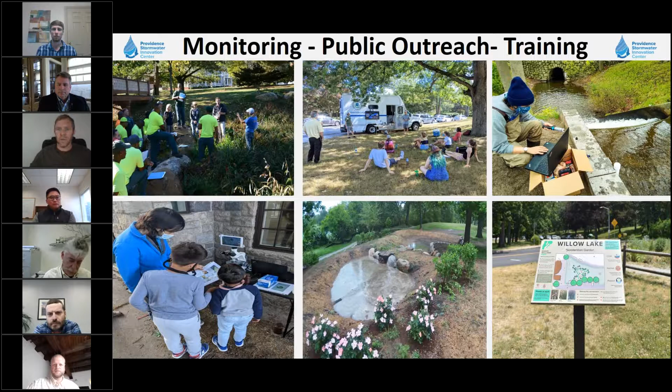Today's webinar is on the Jellyfish filter, and we hope this is the first of a series of webinars in collaboration with the Rhode Island Department of Environmental Management, going through some of their recently approved stormwater technologies.

Then Chris Bill with the Rhode Island Department of Environmental Management will talk about their approval process with these new proprietary stormwater technologies. And Derek Berg with Contech Engineered Solutions will get into the details about the jellyfish filter technology and some best practices when implementing and designing for it.

Then Hernan Peralta of Woodard & Curran and Brian Giroux of Deprete Engineering will give some examples and case studies of projects they've worked on in Rhode Island already using the jellyfish filter.

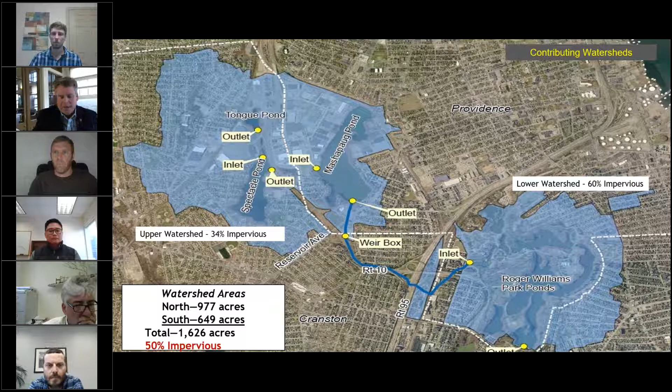So not only do we have a problem with the water coming into the park, but we also have a problem with the water that's here now. And the sediment in the ponds themselves are embedded with phosphorus and nitrogen, and the end result of that is cyanobacteria. So this is a very active park. We have a lot of people that fish here, we have swan boats, we have kayaking, we have all sorts of water sports that take place here.

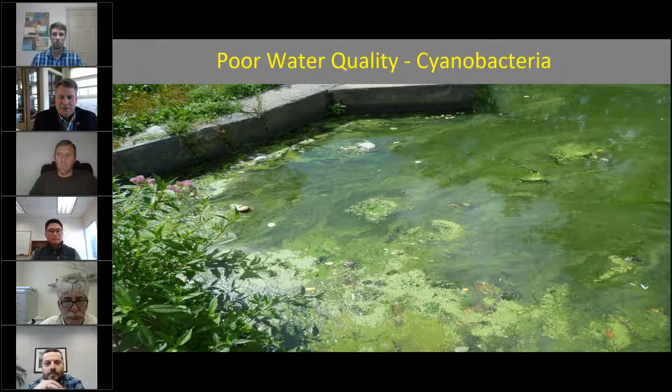So certainly from a public safety stance, we need to do better with our water quality. We can put as many signs up as we want, but the reality is people are going to do what they do, and we need to make sure that when they come in contact with the waters in Roger Williams Park, that they're safe. So to that end, we are continually looking to improve our water quality and remove the phosphorus and nitrogen and other contaminants that make their way into our water.

So getting back to the pond, and I will apologize for my rudimentary drawing here. It's not the fact that I am not good at CAD or didn't have time to, but it tells a better story. It tells a story about the Stormwater Innovation Center and what it is. This is literally a drawing that we made in a conversation with some of the great members of the Stormwater Center, UNH and URI and DEM and DOT.

So the basic function would be the pipe comes in from Mashapaug, it goes through a couple testing ports, it goes through the jellyfish filter, which we hope will remove most of the phosphorus that's connected to sediment. I'm not going to speak to the engineering of this because there's much more talented people than me on this call, but what we believe will happen is the phosphorus connected to sediment will be removed in the jellyfish filter. We're actually calling this a treatment train.

We're going to have a secondary facility that we can put different types of removal systems in as they are developed and as we choose. We're thinking we're going to start out with biochar - it'll basically be a concrete structure that we put biochar in, and we test that out for a couple of years, and then we may go on to the next thing.

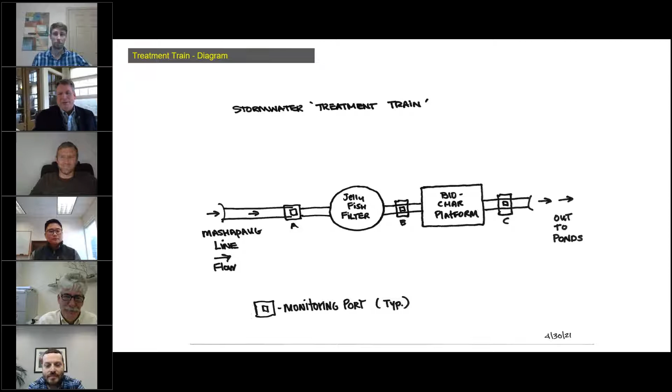I'm hoping that somebody invents a filter made of mattresses, because we are full of mattresses that have been discarded on the streets of Providence that we clean up all the time, and if we can find a way to utilize them, we'd be doing pretty well.

So again, just from a conversation with a couple of experts and researchers, we developed this philosophy and this intent to do this. The reason why we led ourselves to the jellyfish filter is because real estate was at a premium. There's not a lot of area between our property line and where this pipe comes into the pond itself. So the jellyfish filter can be used in a very small area.

So this would actually be installed in line in that pipe, with the treatment train, with overflows and bypasses that will allow us to deal with the bigger storm events. But in the end, this facility will be right next to Roosevelt Pond. Up higher from Roosevelt Pond is our casino.

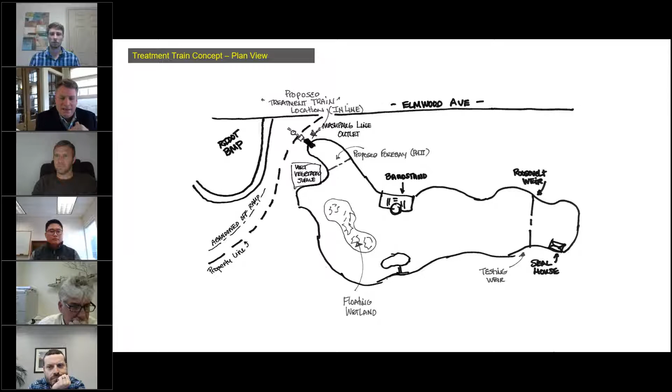There was never any gambling had at the casino, but we do a lot of trainings with the Stormwater Center at the casino. So the hope is to not only install this and get the contaminant removal, but also to provide training and some research about how this functions and what is needed to maintain them.

So the Rhode Island Department of Transportation has several of these jellyfish filters installed. As you can imagine, they're installed in highways, and that's not a great place to have a training. So it was a dual cause for us - one, we want the contaminant removal.

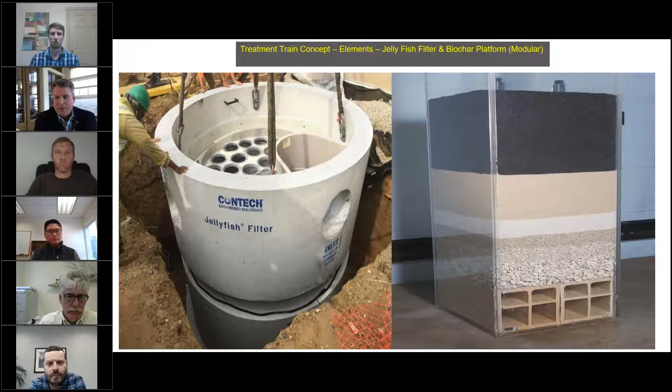We also want to be able to provide training to a brother agency that really needs it. That's why we came to the Jellyfish filter option. We think the treatment train will provide the contaminant removal we need, and also provide a training opportunity for Rhode Island DOT.

That's the mission of the Stormwater Center: provide opportunities for all stakeholders to share in their challenges, issues, and struggles. We know bad construction design can be difficult, both in the actual construction and the maintenance. Bad construction that's not done right leads to poor performance, and poor performance ultimately leads to poor water quality. So that's what we're looking at here at the Stormwater Center. The Jellyfish option isn't just phosphorus removal, it's a training opportunity.

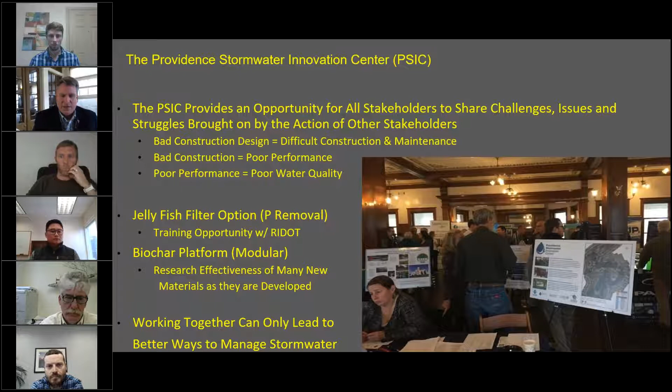The biochar is modular, so we can retrofit it, as we said. Ultimately, working together leads to better ways to manage stormwater, and that's what we do here at the Providence Stormwater Innovation Center. Reach out to us at stormwaterinnovation.org and let us know if we can help, and share the information you've been gathering about what you've been doing in your home or municipality.

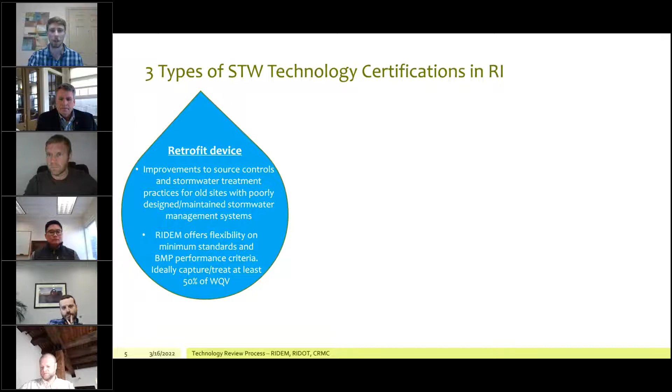Are there different types of stormwater treatment technology certifications in Rhode Island? Yes, is the short answer. There are three different types. The first is a retrofit device, which is basically just making an old or poorly designed or maintained site better. We're pretty flexible on our minimum standards and BMP performance criteria for this, because it is still an improvement at the end of the day. Ideally on these retrofit projects we'd like to see at least 50% of the water quality volume being captured and treated, but we are more flexible on the performance criteria for pollutant removals.

Next we have pre-treatment devices, which are used to protect water quality BMPs from getting clogged with things like sediment and trash. We require that any proprietary pre-treatment device that gets approved show at least 25% or greater removal of total suspended solids. These can also be used as retrofit devices. They won't get nutrient removal or necessarily bacteria removal either, but it will still be an improvement, like I said. That's why it can be used as a retrofit.

Another note for pre-treatment devices: previously we allowed them to be used as oil water separators as well if they had greater than 500 gallons of hydrocarbon storage. But we are no longer allowing that anymore because of some recent discoveries that we've made.

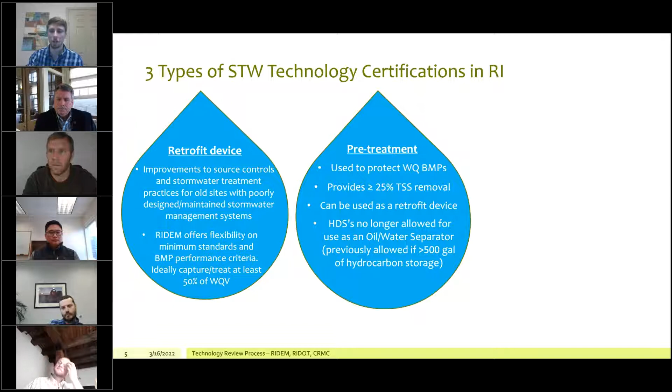Last, you have water quality BMPs, which are the highest level of certification for a device. They must provide at least 85% removal of TSS, 60% for pathogens, and 30% for total nitrogen and total phosphorus. Vendors can also, if they can prove with adequate testing that they get higher pollutant removals, for example the Jellyfish, I believe, is approved for 50% phosphorus removal. They can do that, and also get approvals for other things such as other pollutants like metals.

And down at the bottom, there's the application form that vendors have to fill out and submit to us to start the application process for a technology.

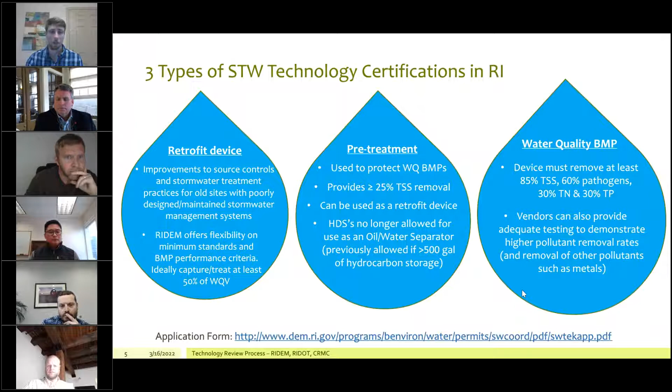Moving on, how does the application and review process work for these proprietary stormwater treatment devices in Rhode Island? It starts out with the vendor going out and getting third-party verified TAPE or TARP testing, which shows that they get the pollutant removals that we require. They fill out the application form I showed the link to on the last slide, and then submit the necessary materials specified in that form to us.

Then the Rhode Island Technology Review Committee reviews the application for completeness. The vendor has an option to give us a presentation on their technology if they so choose. Then the TRC evaluates the submittal and determines if the requirements are adequately met, and from that point we issue comments and request additional info from the vendor if necessary.

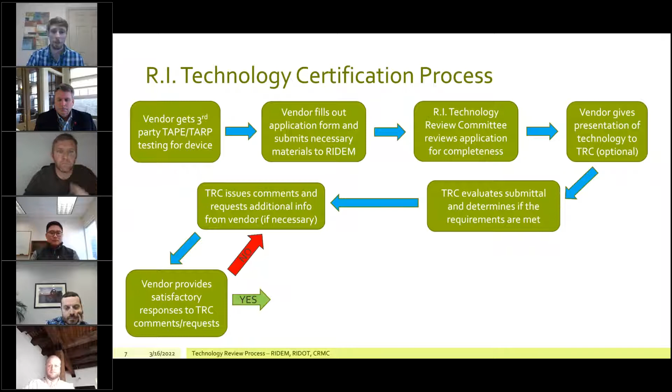Once we issue our comments, the vendor has the opportunity to provide responses. If they're not satisfactory, we issue more comments, and keep doing that until the vendor can provide satisfactory responses, or their device just won't get certified. If they do provide adequate responses, the TRC finalizes the certification conditions, including sizing of the devices to make sure they treat the water quality volume adequately without bypassing first, and things like maintenance and reporting as well.

From there, we issue the technology certification for that device, valid for five years. Once we issue the certification, we hold training sessions just like this one for review staff in Rhode Island, designers, municipalities, and potentially maintenance providers down the road.

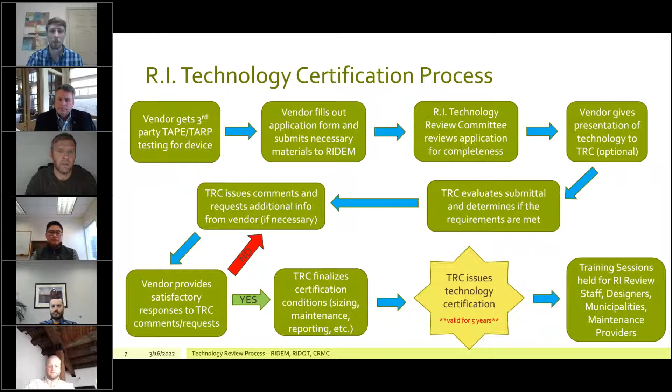So pretty promising stuff. And like I said, I was going to explain TAPE and TARP. TAPE is the Technology Assessment Protocol for the Washington Department of Ecology. They're pretty much the gold standard for testing requirements for stormwater treatment devices. TARP is the Technology Acceptance Reciprocity Partnership, which consists of a few states throughout the country.

I believe Massachusetts, New Jersey, Virginia, California, and a few others. That kind of fizzled out, so it's not really as relevant nowadays. Another thing I should mention is that a lot of pre-treatment devices have been going through the New Jersey DEP for their certification on TSS removal, because they're another good program that has been doing a lot of good work.

So applicants that don't have a TAPE or TARP certification already have the opportunity to submit reports and materials to us that have to be essentially on par with the TAPE requirements, and that's specified in Appendix J of the manual for stormwater in Rhode Island.

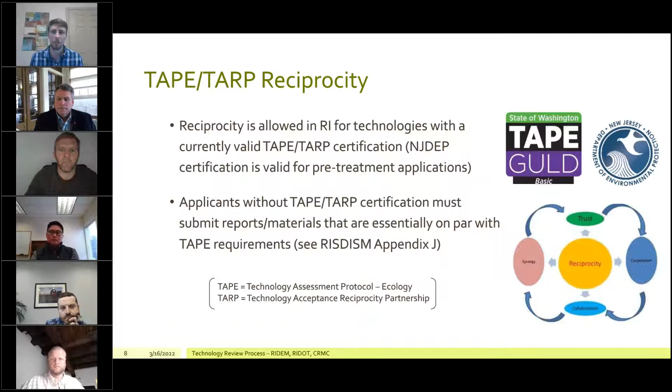But this is really not the best process to go through. We have limited staff, so conducting a full-on review of a technology like this would be a pretty big challenge to take on for us. So it's best to have vendors get that TAPE or New Jersey certification, just so they can get reciprocity and streamline the process.

Some requirements for reporting on the vendor: the applicant can request a maintenance schedule after the first year of operation. If the technology gets transferred to a different owner, they have to let us know any device design changes, O&M model name or number changes, system failures, along with why it happened and how they fixed it.

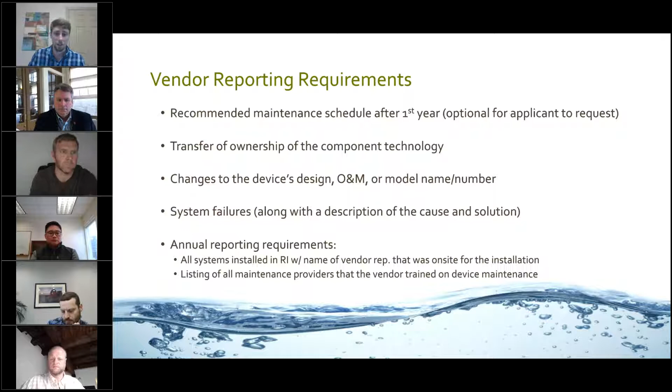And then annually, we require a list of all installs in Rhode Island with the representative who was there to make sure it was installed correctly, and a listing of any maintenance providers that they may have trained.

After that five-year period, once their certification runs out, they can get recertified. They have to have adequate reporting throughout their certification period, and provide us with any additional studies, testing, or certifications. If they have any previous certifications that got expired or revoked, that can potentially lead to some issues, because we still need them to show that they still meet the requirements from our rules.

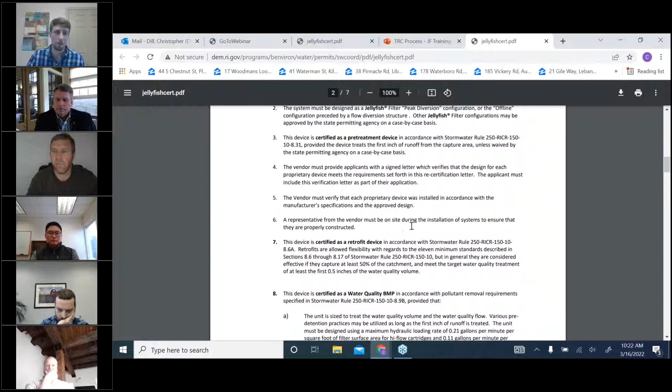It has to be sized to treat the water quality volume, and we kind of explain a little bit of the sizing as well. We can get into that a little bit later with the sizing table.

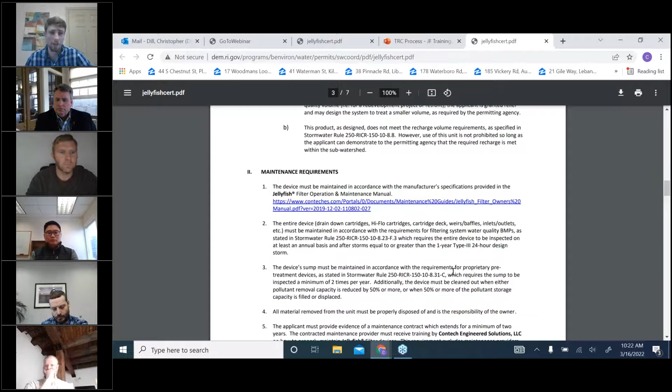And then we have the maintenance requirements right here. All proprietary water quality BMPs have to be maintained once a year as a whole system, and then their sump, which is required for all these devices, has to have some sort of sump or upstream manhole to collect sediment. That has to be cleaned out whenever it gets more than half clogged, or at least inspected twice a year.

There's the reporting requirements that I was talking about earlier, and then some other general language. You can see Eric's signature right there.

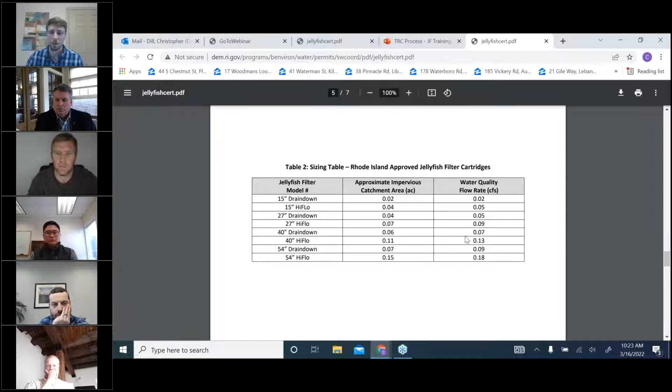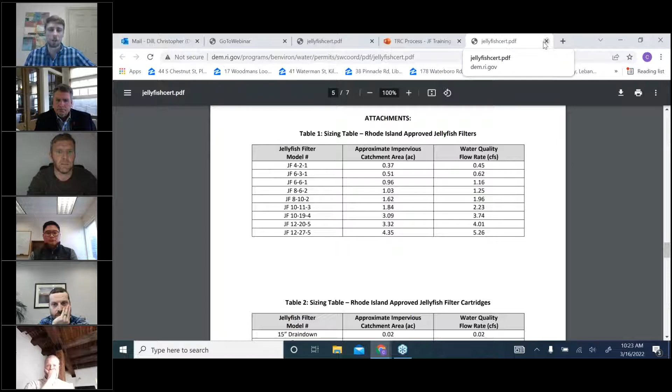And here you have the different size filters with their different flow rates. This table right here is based on the largest size filter, but there's some other language in the certification that explains how you could figure out the water quality flow rates for the smaller filters.

And then there's just some general details at the bottom. All right, moving on.

So some currently certified technologies in Rhode Island for BMPs: we have the Filterra, the Jellyfish, the Focal Point, and the Kraken.

And then for pretreatment and retrofit devices, we have Stormceptor, Hydrostorm, Cascade Separator, Continuous Deflective Separator also known as CDS, and Cyclone X. And we are also in the process of reviewing the recertification application for the Modular Wetlands System Linear, which is another BMP that was previously certified in Rhode Island.

Proprietary technologies, and stormwater treatment in general, are pretty new topics, generally speaking. So it's an evolving world, and there are some things to keep on the radar.

EPA hasn't developed performance curves for these proprietary technologies yet, but hopefully that's something they can move forward on in the future. Also, ASTM is working on developing some standard specifications and requirements for these proprietary stormwater treatment devices. I believe Jamie Houle from UNH is going to be pretty heavily involved in that.

Another thing to mention is that we will be holding more training webinars on other approved technologies. The DEM, Audubon Society, the Stormwater Center, and SNEP will hopefully be collaborating on more of these trainings. So I hope you enjoy it.

All right, you guys see my screen okay? Yep. Perfect. Well, hello, everybody.

I really appreciate you all taking the time to be here and also appreciate having the opportunity to participate. I'm thankful for all the participants and folks partnering to put this together, and most importantly, thankful for DEM, Rhode Island DOT, and CRMC for rebooting this process. It's a lot of what I do as director of regulatory operations for the eastern half of the country at Contech.

A lot of my time is spent interfacing with programs just like this, working on product reviews and approvals, and sitting on a lot of stakeholder committees. I'm actually part of the ASTM group that Chris mentioned, and I'll give it a quick plug—it is very active. Jamie Houle is definitely a part of it, among a number of other movers and shakers in the stormwater world.

The end game for some of the initial standards going through that program is to feed into what's hopefully going to become a national verification process for innovative technologies. Their grander vision is that it would be applicable to all technologies, but there's a recognition that resources are limited, and in a lot of states there just isn't time or expertise to go through a vetting process for technologies like these.

Today I'm going to spend the bulk of my time getting into some nuts and bolts on what the Jellyfish filter is, how it works, and some of the core processes and components. I'll get into a little bit of a primer on how systems like this are sized, as well as talk about performance data and a quick overview on some maintenance basics, but won't get too deep on any of that today.

But there is a nice chunk of time allotted at the end of this session for questions, so don't hesitate to type away as we're rolling along, and we'll get to as many as we can. If not during the Q&A, I'll certainly do my best to follow up on anything applicable to me specifically after the fact.

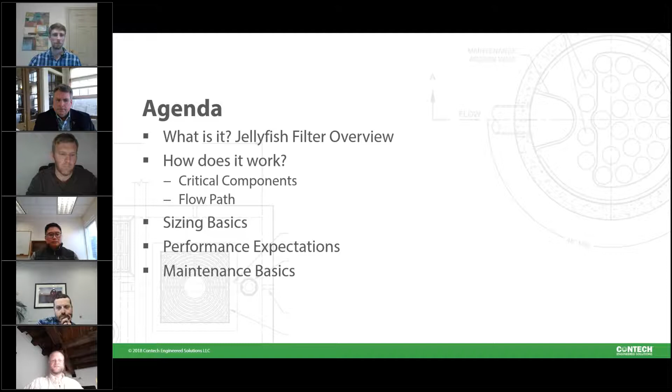So let's get rolling. I thought it'd be a good place to start to talk a little bit about surface or membrane filtration versus bed filtration. The Jellyfish filter is a membrane filter. You've probably heard of some of the other filters. We actually have another filter in our repertoire that is a bed filtration system.

Jellyfish filter is a cartridge filter with pleated membranes in it, and one of the things about membranes is they do a very nice job of filtering out fine particulate. Jellyfish filter is a passive system, so it's not targeting any sort of dissolved pollutants. You heard Brian talking about targeting particulate, but that's exactly the kind of application Jellyfish is best suited for.

Whereas if we're talking about a bed or media filter, we can often customize that type of solution. If we get into more specialized situations, we're looking at dissolved metals or nutrients or things of that nature.

So with membranes, one of the core principles to keep in mind is that you're doing most of your filtration at the surface. You often have a pretty fine interface that filters out particulate and lets the water pass through that membrane, and it builds up a surface cake. The nice thing about a surface cake is it actually makes the filter functionally improve as far as its ability to remove particulate over time.

But we're going to be very mindful of clogging during the design, and I'll talk a little more about that. Whereas with a bed filter, you've got a little more leniency as far as clogging goes. You've got interstitial spaces between the media, and ability for particulate to accumulate within the media bed itself. You often can size those at a little bit higher hydraulic loading rate, and I'll talk more about how that plays out in filter sizing in a minute.

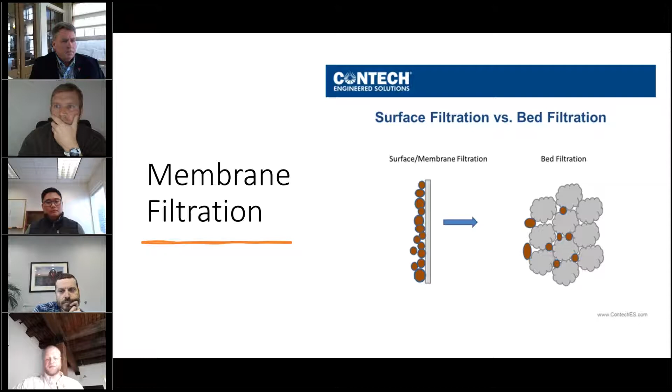And there is actually a flow-controlled orifice plate on the top of each cartridge, so we regulate how much flow can get through each cartridge. The reason for that is that with filters, the way they're typically tested in design is to establish a maximum flux rate or hydraulic loading rate that they can operate at and meet their performance objectives, as well as have a reasonable amount of longevity out in the field.

So with jellyfish, we have some different sizes, and it really comes down to, do you have depth on your site? If you've got the depth to go to 54-inch, that's going to often be your most economical option, because the quick rule of thumb is the deeper we can go, the smaller we can make the horizontal footprint. So if we had to use a 15-inch long cartridge instead of a 54, you're approaching a 4x increase in the number of cartridges that would have to go into a vault to treat the same amount of water. So the vault obviously is going to have to get much bigger for that.

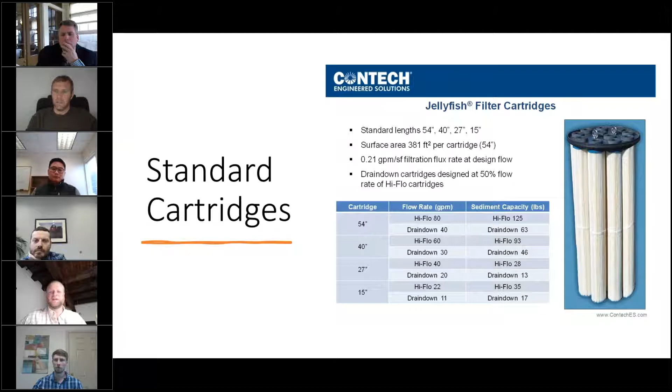Flows coming in through an inlet on the left side, flows into this little pool. We call that the maintenance access wall, because we do provide overhead access directly to that space. So you can insert a vactor hose directly into the sump of the system and back it out. That's also where all of our floatables, any floating trash or debris or oil is going to accumulate right in that space, and it serves to provide some pre-treatment to the cartridges themselves.

Flow is then going to go down below the cartridge deck. The coarse solids actually settle out into the sump of this system without ever making it to the filter. So it's got a built-in pre-treatment component to it.

These systems are designed typically with about 18 inches of driving head across the system. And one of the very nice things about working with a membrane cartridge versus working with a media cartridge is that when it comes time to install and or maintain these systems, these membrane cartridges are much lighter than, say, a wet sediment caked media cartridge.

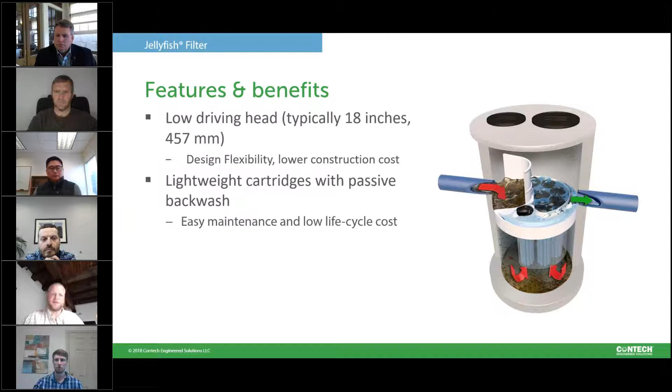So I'm going to fire on an animation clip for you in a minute, and I'm going to pause it a couple of times along the way. But this just gives you another look before I start it up.

You can see the inlet on the left. Flow is going to pass down. There's a separator skirt that actually wraps around the cartridge, and I'll show you a good picture in a minute that gives you a better look at that. It's literally kind of a skirt that hangs down below that deck and provides a level of protection from any oil or scum or debris from getting wedged inside those membranes. And then obviously the heavy stuff that can sink, it's going to go down to the bottom of the vault.

Flow passes through those tentacles, if you will, from the outside radially, so it hits the surface, flows through the tentacle into the center of each of those tentacles. There is then a drainage channel that leads up to the top of the cartridge, where flow is then discharged back up on top of the deck and heads out of the system.

So I'm going to fire this up, and I'll pause it a couple of times along the way here, but I'm going to turn it over to this automated voice for a second.

Contech Engineered Solutions introduces the Jellyfish filter, an engineered stormwater treatment technology featuring pre-treatment and membrane filtration in a compact system. The Jellyfish filter removes a high level and wide variety of stormwater pollutants, such as fine particulates, oil, trash and debris, metals, and nutrients.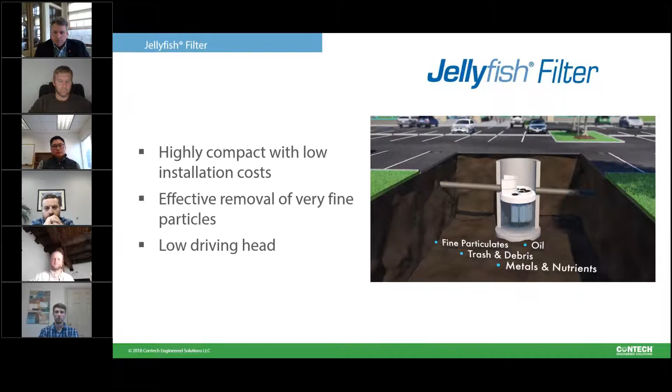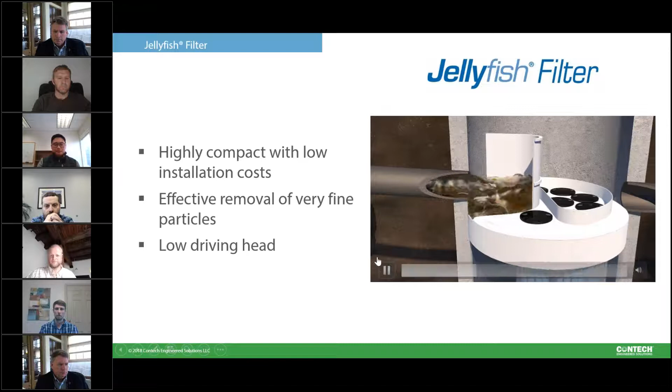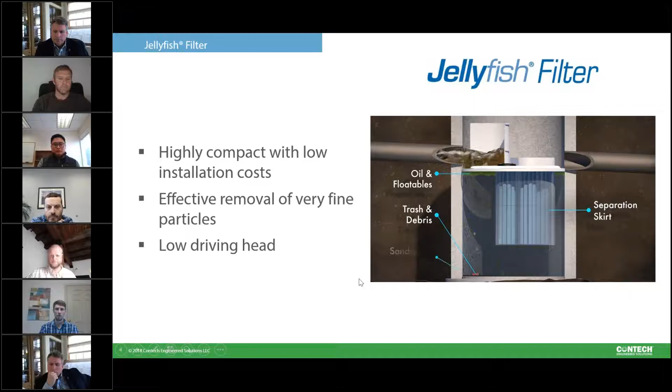Treatment begins as stormwater enters the Jellyfish through the inlet pipe, builds driving head, and traps floating pollutants behind the maintenance access wall. Water is pushed down to the treatment chamber, where a separation skirt around the cartridges traps oil, trash, and debris outside the filtration zone and allows sand-sized particles to settle below the cartridges in the sump. Water is forced up from the treatment chamber through membrane filtration and into the backwash pool.

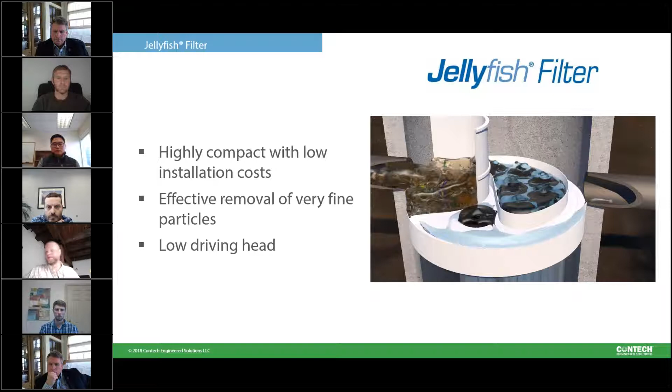So I wanted to stop right there for a second to give you a more in-depth talk on the backwash pool and the drain down cartridges I mentioned before. You can see the bulk of those cartridges have that little 6-inch high wall around them, and that's what they're referring to as the backwash pool.

In this case, this is a fairly small system, so there's one drain down cartridge located outside of the pool. What happens is as head starts building on the system with flow coming in, that drain down cartridge will trickle flow up until the backwash pool fills, and then all the cartridges start spilling over and contributing to the effluent.

What this pool really serves as is, at the end of the storm event when we've treated all the incoming flows and the system has reached equilibrium, that pool of water is then able to push back through the cartridges and discharge out through the drain down cartridges, which are outside of that pool. That's the passive backwash feature we're talking about.

Once the water has filled the backwash pool, water overflows the weir and exits via the outlet pipe. The high-performance membrane filtration provided by the Jellyfish filter's pleated tentacles ensures long-lasting treatment and provides a large surface area to effectively remove fine sand and silt-sized particles and a high percentage of particulate-bound pollutants, such as nitrogen, phosphorus, metals, and hydrocarbons.

Last but not least, I already hit on this, but this is a fully passive filter. There's no reactive capacity to these membranes. So when we're talking about removal of other pollutants outside of solids, it's strictly the particulate-bound pollutants.

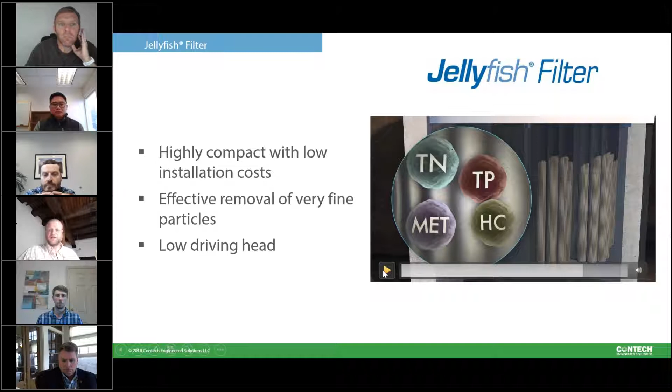Oh, whoops. I think we're just about at the end, but I will see if I can skip it ahead for you.

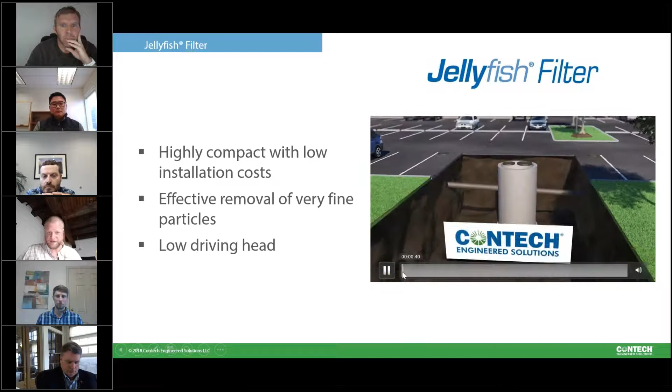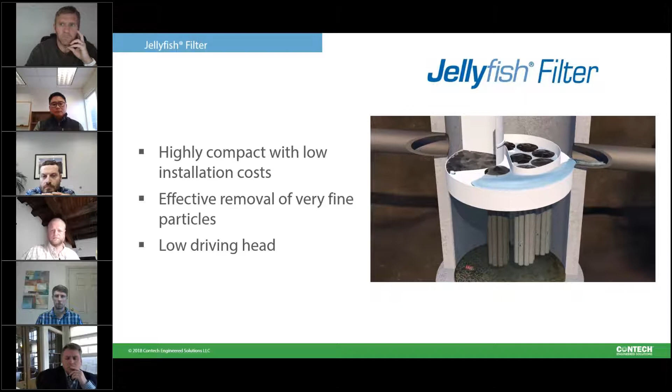Water caught in the backwash pool flows back into the treatment chamber through the membrane cartridges. This passive backwash extends cartridge life and keeps them clear for future events. The drain down cartridge located outside the backwash pool enables water levels to balance.

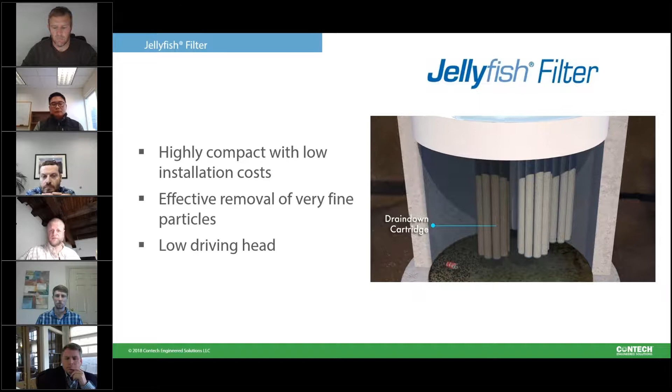We'll use that standpipe as a pressure relief and an emergency overflow if we ever got into a situation where the system was clogged and neglected. We certainly wouldn't want to create any upstream issues as a result of that, so we do provide emergency relief in the majority of these systems to address that.

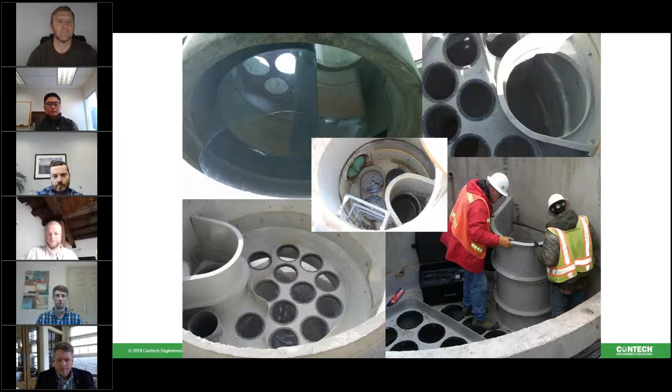Moving along, just a little bit about standard configurations. Manholes are very common for the smaller projects. We can scale up from anywhere from 4-foot diameter to 12-foot diameter manholes. That's about the limit that most precasters are making manholes these days, and there's certainly some structural limitations with the decks and things like that on how big they can get. But generally, once you know how deep you can go, you know what your capacity is per cartridge.

And you can pick out the number of cartridges you needed based on your water quality flow. We also do vaults when we get into big projects and we want to use Jellyfish. There's really quite a bit of ability to go pretty large with the vaults if there's a desire to do so. We can also do multiple smaller units on sites as well if it makes more sense to disperse things.

One of the nice things we can do with these vaults, and I'll talk a little bit about online versus offline, is that the Jellyfish filter is typically an offline system. It's not intended to treat flows or have flows routed through it above its water quality capacity, or water quality volume, if you will. But when we're working with a vault system, we can do what we call a peak diversion design, where we incorporate a bypass structure into the same vault structure upstream of the treatment bay, so that we can route the water quality volume into the treatment bay and bypass downstream without needing separate junction manholes to do that.

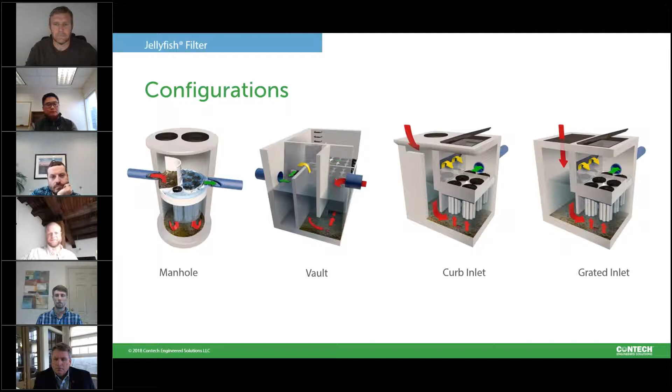So as I mentioned, if we had a vault design in play, we can often put that vault in line and use kind of the peak diversion concept to achieve this without those extra manholes, which I know oftentimes is appealing depending on whether there's constraints or space limitations, or it can be a cost savings too. From that perspective, we do have online design tools and some automated design tools, and I'll steer you towards that. But it's reasons like this that our operating rhythm is to have and prefer that before final designs are in place, people reach out to our design team just to make sure we're checking all the boxes on what's possible and what makes most sense for the site.

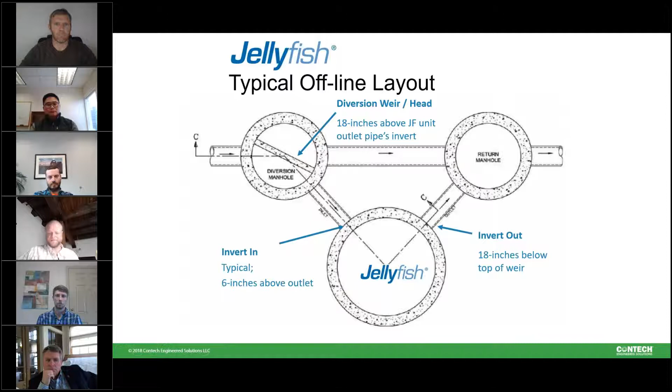Switching gears a little bit, just to talk about some general filter sizing stuff. I'm not going to get too deep into things. The Jellyfish is a membrane filter, so it's a fixed porosity, if you will. I'm sure there are different membranes, but from a generic perspective, when we're talking about filter performance, the type of media and often the gradation of media are going to be a major driver in how well that filter performs. It's not so much an issue with an inert membrane, but when we get into specialized media, we want to make sure we're not setting ourselves up for leaching of previously captured pollutants or any sort of toxicity concerns.

During the product development process, we have come across granular media that we have found to have some toxicity, so it's not something that can really be overlooked. It may do a great job of filtering stormwater, but if it's toxic to birds, macroinvertebrates, or other things in your streams, it's not an ideal solution. So something to be aware of.

All things created equal, finer media does a better job at filtering, but the finer the media generally, the more rapidly it's going to clog. So it's always sort of a balance that needs to be struck between those two things.

Hydraulic loading rate is really going to be a key factor. As I mentioned when we got started, the way these filters are designed and tested is to establish the hydraulic loading rate, usually expressed as a flux rate, or commonly in stormwater, gallons per minute per foot squared of media surface area. The jellyfish is pretty low, at 0.21 gallons per minute per foot squared of media surface area. We can keep it low and still get quite a bit of flow through these vaults because of all that surface area we're able to add using a pleated membrane.

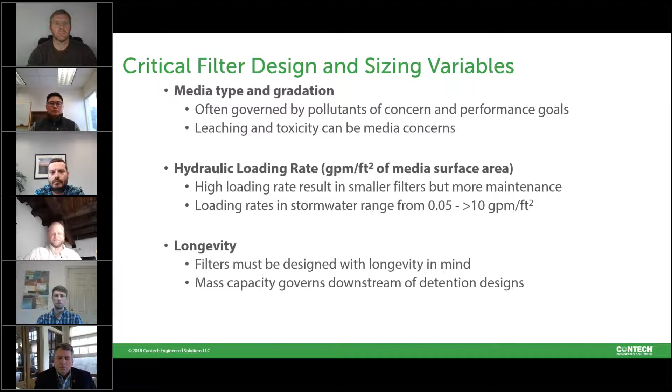So a little bit about performance. You heard Chris talking about TARP and TAPE, and that's exactly the programs that Jellyfish have been through. If you want to talk to states that have programs like this to evaluate innovative technologies, there's very few that will even open the door, so to speak, if you haven't been through TARP, and now increasingly TAPE. For perspective, there's not that many differences between TARP and TAPE, other than that TAPE is probably a little more current - it's been updated several times.

Both of them came out around the same time. Both are long-term field monitoring programs, so we're talking about going out in the field, collecting data over a year or more. Both have requirements for the minimum amount of storms you have to capture, data quality, how many samples per storm, how much of the hydrograph you have to cover. It's pretty involved stuff. It's pretty expensive stuff.

This is one of the reasons why data reciprocity is gaining traction. These studies are north of $200,000 when we're all in, and it's usually done by third parties - all the sample analysis is done by third parties. So it adds up fast, and it's not fast and it's not cheap.

Being able to do credible data studies and then transfer that data and use the local rainfall for sizing is really becoming the norm within the stormwater world.

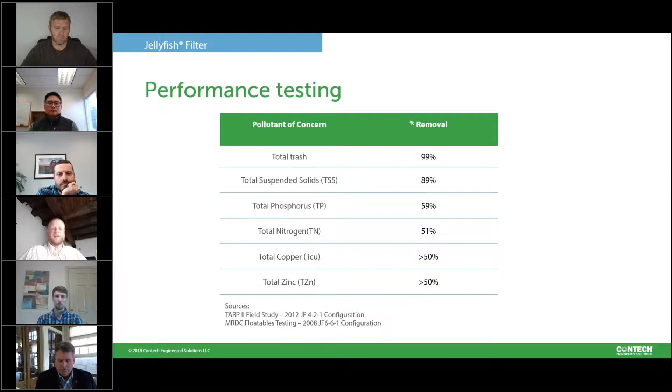We weren't getting much metals on that site, so we don't have great metals data just because we're getting non-detects for most of the storms, so those didn't end up getting reported through as part of the study.

A few things, just a few select certifications here. I'll put Rhode Island at the top of the list - that's probably the newest for the jellyfish, but at this point the jellyfish has been reviewed and certified, verified, or approved, or whatever the local terminology is, by the vast majority of programs in the US and Canada that actually have a formal list in place. Both Maine and Vermont also have lists here in the Northeast.

We keep talking to Massachusetts and New Hampshire and are hopeful they'll do something similar in the future as well. Similarly, New York State, New Jersey, and then down most of the eastern seaboard - Virginia, the Carolinas - all have some form of approval, and similarly out west. The list is ever growing, but the data really speaks for itself. Once we get through these difficult, long, expensive studies, it usually allows us access to participate in stormwater management in most stormwater programs - that's kind of the trade-off of doing a long, expensive field study.

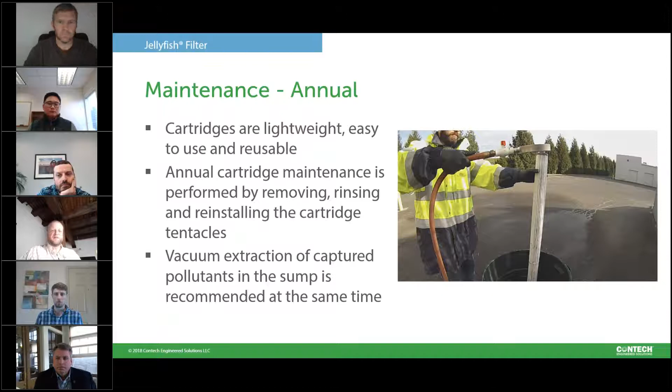We've also trained public works departments and DOTs and anyone else directly that wants hands-on training from us. We've got videos on that as well. But we have a crew of folks, kind of our field services team, that are responsible if something goes wrong during install, or somebody wants maintenance training. We do have a team of people that provides that service. So I don't have time to go much deeper on maintenance today, but here's a quick primer on how

Jellyfish is cleaned. And last but not least, I mentioned at the start that our ultimate preference, before the project is in final design, is that you reach out and engage with our team. We've got on-site engineers assigned to each state, so we've got what we call a stormwater design engineer and a stormwater consultant that are unique to Rhode Island, familiar with all the rules there, the design requirements, what's approved, all the nuances in the letter that Chris pointed out. They'll be your resources to walk any given project through from design to install.

But there are a lot of tools on our website. We've got design tool worksheets, DYOS tools if you just need a quick estimate of what you're dealing with, all the technical documentation, more in-depth maintenance information, and more in-depth information on system performance, and this is true of all of our technologies. So if you're ever looking for basic information, that's the place to start, short of calling one of us up. So I believe that is it for me, and I think we're on to our next question and answer session.

It looks like we have one question that was left over. I'm assuming it's for DEM. It says, can you discuss again the reciprocity with Massachusetts, or the lack of reciprocity, as it relates, I'm assuming, to certification?

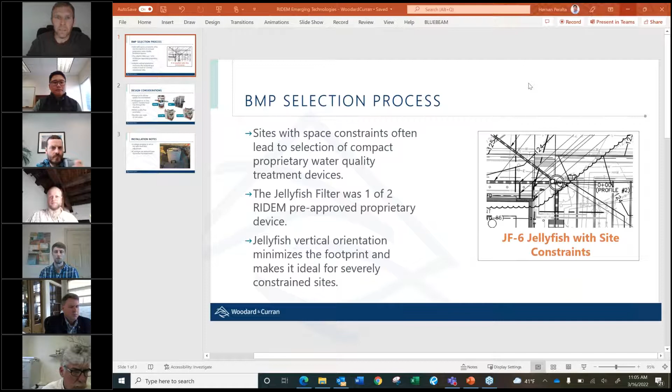Good morning, everyone. My name is Hernan Peralta, I'm a technical manager with Woodard & Curran. For the first case study, we're going to talk about a project in College Hill, specifically Brown University in Providence, Rhode Island.

The site itself is pretty small, congested. The runoff from the site discharges into the city separate stormwater system, which ultimately outfalls to Providence River, an impaired water body for both bacteria and nitrogen. So that was our pollutant of concern when designing these BMPs.

We knew going into the project that the site is very congested with utilities, poor soil conditions, and steep slopes we had to work with based on our project experience in that area. With the existing conditions coming in, as well as understanding the proposed building footprint, that confirmed that designing for and implementing a more traditional BMP would be impractical.

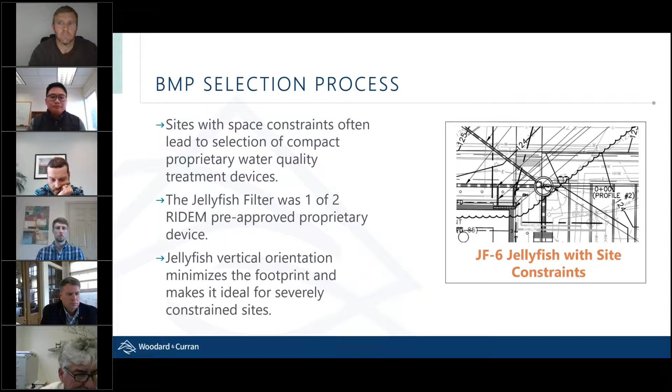During the design process, a couple of things to consider, and I think a couple of the presenters already mentioned this: like all treatment systems, we want to consider whether it's an offline or online system. Obviously offline would be recommended for proprietary structures, as it avoids having to oversize the structure to bypass larger flows.

For our project, we had to design it as online for a couple of reasons. One was that the site was very congested with utilities, so we didn't have any room for a diversion structure and a bypass pipe. Also, the drainage area was less than an acre, small enough that we could design this as an online system to allow peak flows of about 4 CFS to bypass through the system.

If you design it as online, consider the higher head loss through the structure compared to a standard drainage manhole, because there's a built-in weir system in the unit that could potentially create that additional head loss through the system.

Like most proprietary structures, they are designed based on a water quality flow parameter. So a couple of things as designers to size the system: one, you can just refer to that table that Chris had referenced in his presentation to size the system. Looks like the sizing was based on impervious area as well as water quality flow.

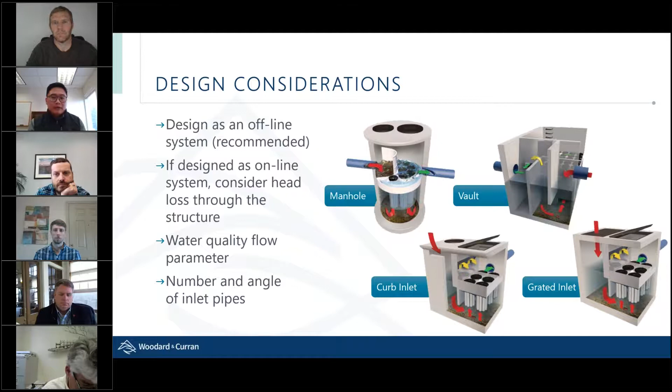One limitation we found with this unit is that because it has a flat slab, there's not much room for field adjustments if you have to, for example, lower the structure.

For this project, the system was located in a prominent area, and the landscape architect we worked with didn't want to see the casting because it would be very visible. So part of the design was to install wonder covers, which would sit on top of the actual casting of the unit and match the hardscape area to hide it below the surface.

To allow flexibility in the field adjustments for the site contractor, we set the castings about 8 to 12 inches below the finished grade, so if they had to lower the grade, they wouldn't have to make any adjustments—they'd have 8 to 12 inches of play to use. However, if we had to raise the grade, we can use bricks or concrete collars to raise those castings.

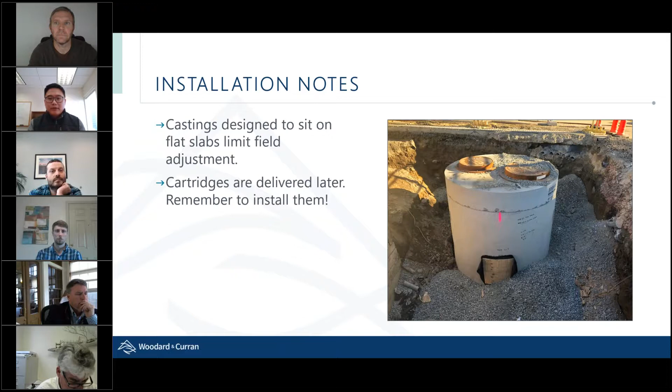With that said, I'd like to turn it over to Brian for the next case study. Thank you.

All right, I'm going to talk about two different projects. The first project is Project Schooner, located in Johnston, Rhode Island, right on Hartford Avenue, next to the intersection of 295 and Hartford Avenue. This is proposed as a large industrial building, 800,000 square feet plus footprint, with associated parking, and includes extensive improvements to Hartford Avenue—needed safety improvements and widening of over 4,000 feet of Hartford Avenue.

The big problems we have with this type of site: we're in an impaired waterway, impaired for bacteria and copper. High groundwater, high ledge, like most sites honestly, and steep slopes, so infiltration areas on the site are very limited. With the Hartford Avenue improvements, we've got the widening, which is all new impervious area, plus existing impervious area that's not treated, and we're in a limited right of way—so not a lot of room to do things.

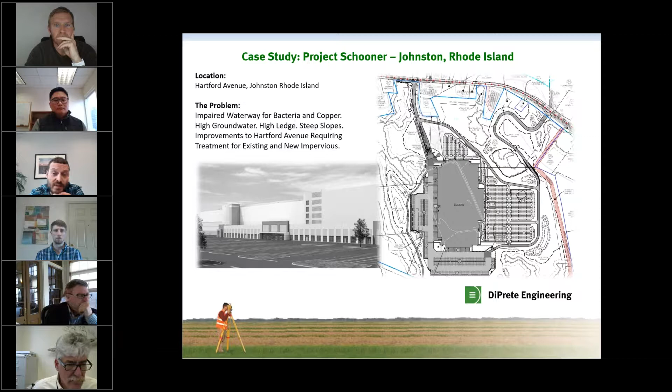And then in other limited areas along Hartford Avenue, like where entranceways go toward a main roadway, which usually has very limited right of way and room to do things, we added Jellyfish filters at those locations to maximize water quality to the maximum extent. This gave us an opportunity to treat as much as we could on Hartford Avenue, as well as the proposed impervious area from our site.

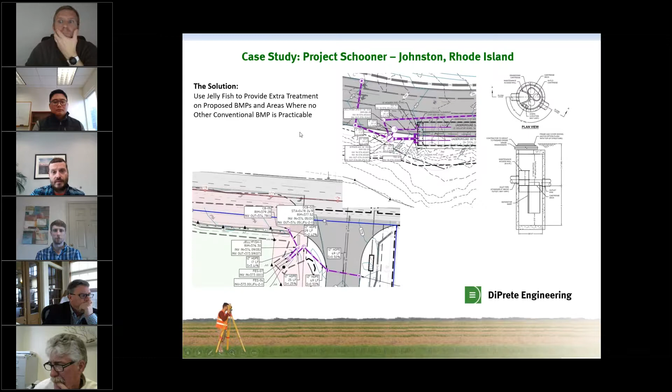Next project I want to mention real quickly is Tidewater Landing in Pawtucket, Rhode Island. This one's actually located right on the Seekonk River, and this was a former contaminated site. It was an old manufactured gas plant. It's abandoned and cleared today, but it needs to be remediated and capped.

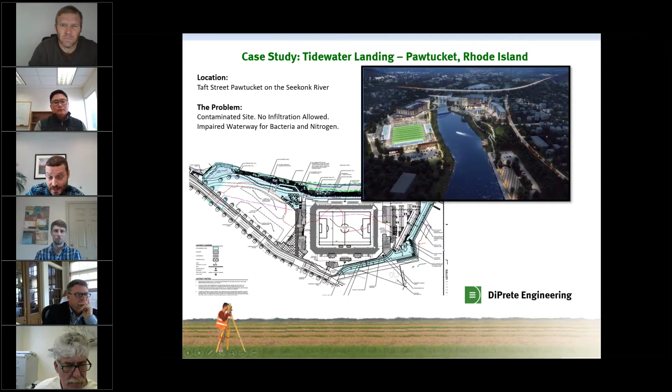So once again, we've got a site that's along an impaired waterway, can't infiltrate, and we're impaired for bacteria and nitrogen. Obviously with any impaired waterway, any increase to impervious area causes all sorts of havoc with the pollutant loading analysis. This is where the Jellyfish helps get the removals we need. This site, just like every other site, especially in an urban area, we're maximizing the site to everything. This is right in Pawtucket, very urban, and it's the proverbial 10 pounds of stuff in a 5-pound bucket, probably 2 pounds on this site.

The Jellyfish really was useful on this site because we have a city drainage line that comes right through the middle of the site, with probably close to 10 acres of stormwater coming to it, 8 acres being impervious. We were able to take that to an offline configuration, and with a 16 by 8 foot structure, a really small footprint, we're able to treat those 8 acres of impervious area and get down to the pollutant loading we actually need. So this is where we see the real big benefit in the Jellyfish: those really tight spots, really hard to reach areas, treating to the maximum extent practicable because it can do it in a small footprint without being too much of a problem getting it to fit on the site.

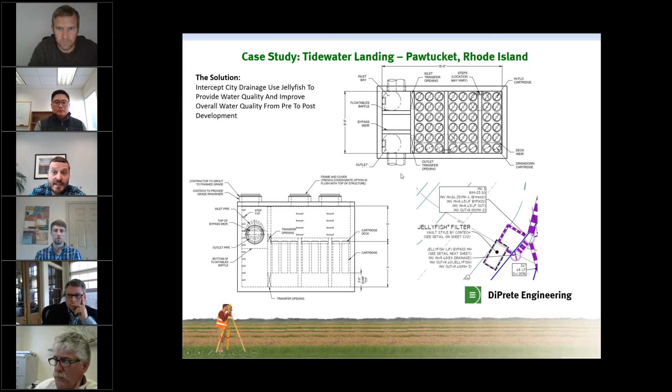And that's my 2 quick case studies. I want to pass it back to Ryan.

Okay, thank you both Hernan and Brian for sharing some of your lessons learned when implementing a Jellyfish filter. It does look like we just have one question for Hernan about some specifics of where exactly on the Brown campus the project was located.

Yes, the project was for the Performance Arts Center. Again, still in construction. Completion is next year.

Well, it doesn't look like we have any other questions at the moment. Well, we got some more coming in. Last minute, where did that one go?

Here's one about what are some general costs of the Jellyfish filter units? That would probably be directed towards Derek.

Yeah, it's hard for me to give you a real defined answer on that one. I don't know the modern price list, if I'm being 100% honest, but it's safe to say there's economies of scale. By that I mean if you just need a couple of cartridges, it's a few thousand dollars type of thing. But when you get into the massive systems, the per-cartridge cost starts to go down. Similar to a lot of these innovative BMPs, they're not cheap per se. You're certainly paying in some cases to save that space. But if you wanted to reach out to me, I can put you in touch with our stormwater consultant who can start to hone you in on ballpark price lists for different type systems and stuff like that. I don't have that information right at my fingertips.